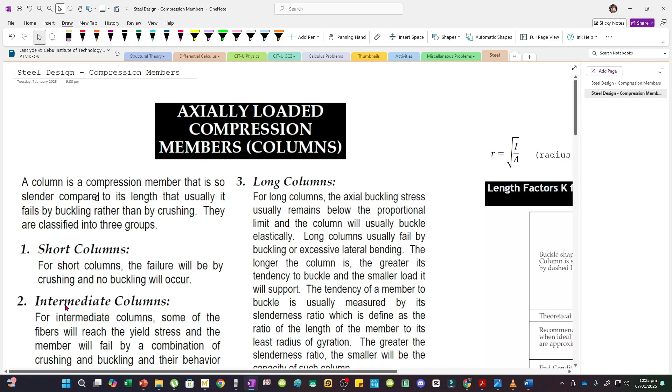Parang imposible na yung configuration na yan. So, that's why sa solving natin, we usually tackle intermediate and long columns. Dito naman tayo sa intermediate columns. For intermediate columns, some of the fibers will reach the yield stress and the member will fail by a combination of crushing and buckling, and their behavior is said to be elastic.

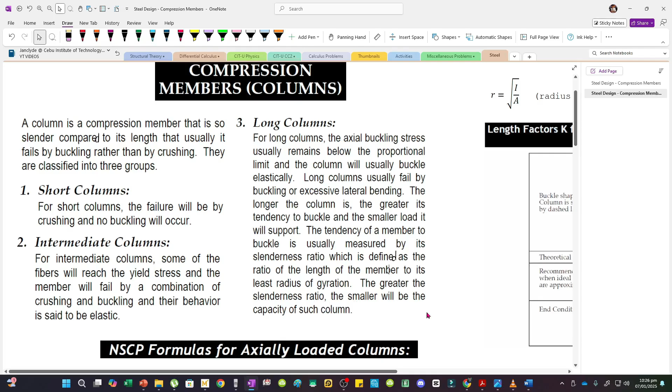Now, the difference between long columns and intermediate columns is that for long columns, they usually fail by buckling or excessive lateral bending, and generally, the longer the column is, the greater the tendency to buckle and the smaller load it will support. Also, the tendency of a member to buckle is usually measured by its slenderness ratio, which is defined as the ratio of the length of the member to its least radius of gyration. Least, kasi yan yung magiging critical. The greater the slenderness ratio, the smaller the capacity of the column. You'll understand later kung bakit yan ganyan.

Now, take note na yung radius of gyration, ito yung formula niya. R is equal to square root of I divided by A. Yung I, it depends kung saan yung axis ng bending. So, it may be IY or IX.

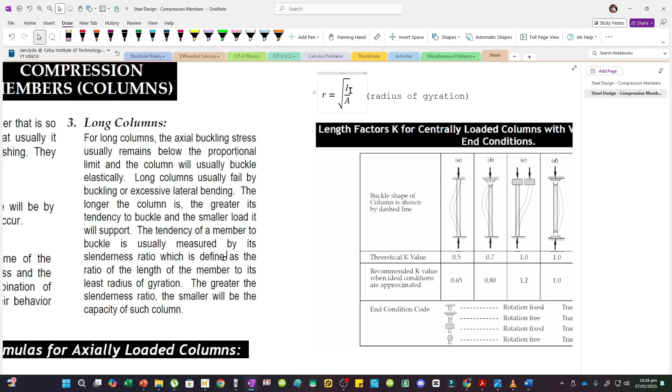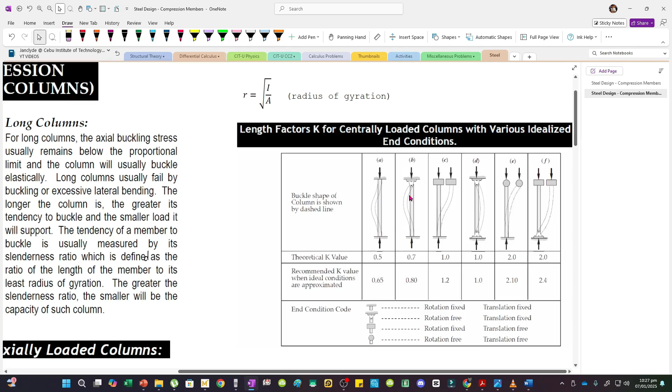Meron tayong length factors for centrally loaded columns with various idealized end conditions. Ito yung mga buckle shapes. Itong mga nakadash, yan yung configuration ng column after the loads are applied. I-clarify ko lang, yung ratio of the length of the member to its least radius of gyration, yung length na i-consider dyan is the effective length.

Sabihin lang natin na meron tayong pin-connected supports, parang ito yan, itong letter D. Merong hinge, saka hinge din sa kabilang end. Kapag meron tayong pin support, if you want to know the effective length na pwedeng magbuckle sa configuration natin, basically, yung magbabuckle dyan is the entire length. That's why, yung theoretical K value natin is 1.

The formula for effective length kasi is LE equals K multiplied by L. So, if this total length is L, multiply natin by K, parang 1 times L, yung original length lang. Ito lang talaga. Yung buong length yung magbabuckle. Yung point of inflection kasi natin is nasa supports, this support and this support.

Kapag naka-hinge. Again, yung point of inflection, yan yung point kung saan mag-change yung curvature ng beam mo. Essentially, beam or column, isang bending direction lang yan. Ito yung points of inflection. Normally, but not all the time, mag-occur yan kung saan zero yung moments. Zero yung moment sa dalawang pins, so andyan yung point of inflection. Yung purpose ng K is to modify kung anong length posibleng mag-buckle yung column mo.